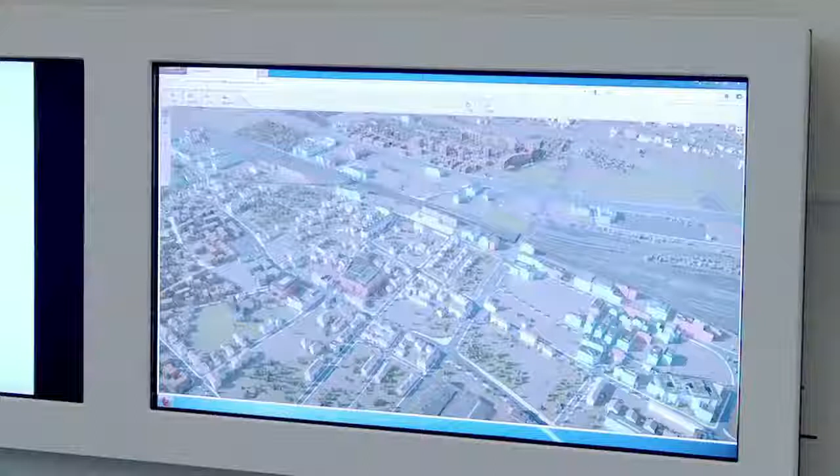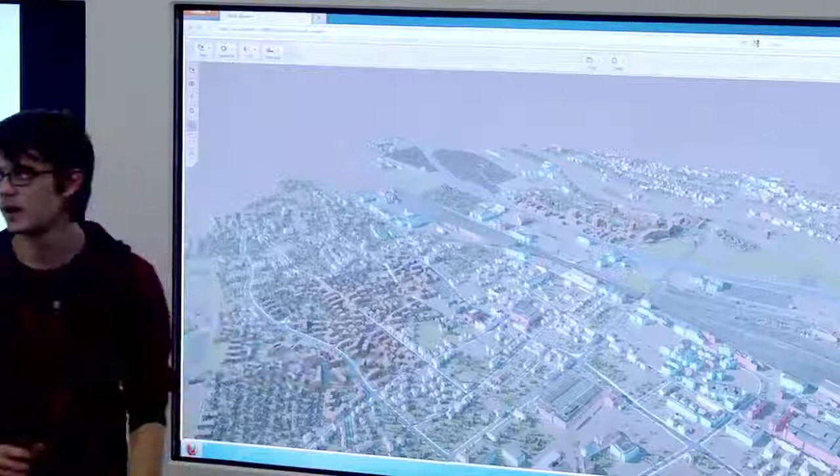Basically, this area, compared to the other areas, is very different because it lies between the railway, which we have here, and the highway going from Zurich to Aargau. So it's a very disconnected area, and we won't find housing there.

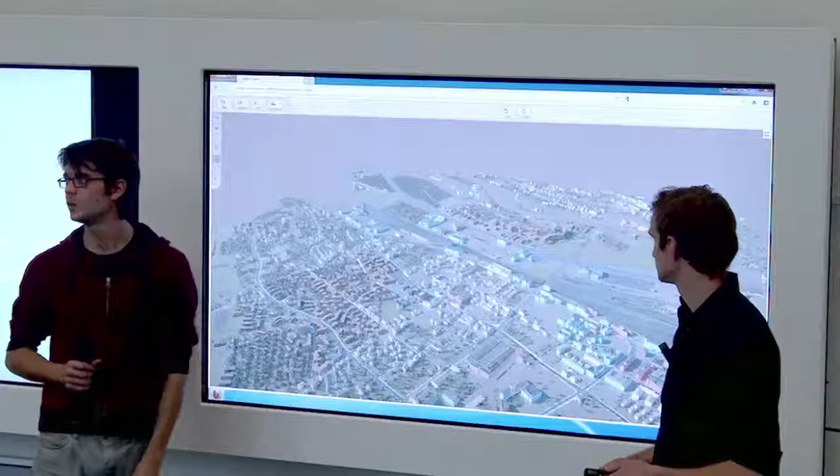As we said, it's a little bit different, so we'll only find special district zones. We took an analysis of different locations in the zone, and we'll see that the density going from Aargau, or let's say Schlieren, to the city will always get denser and higher.

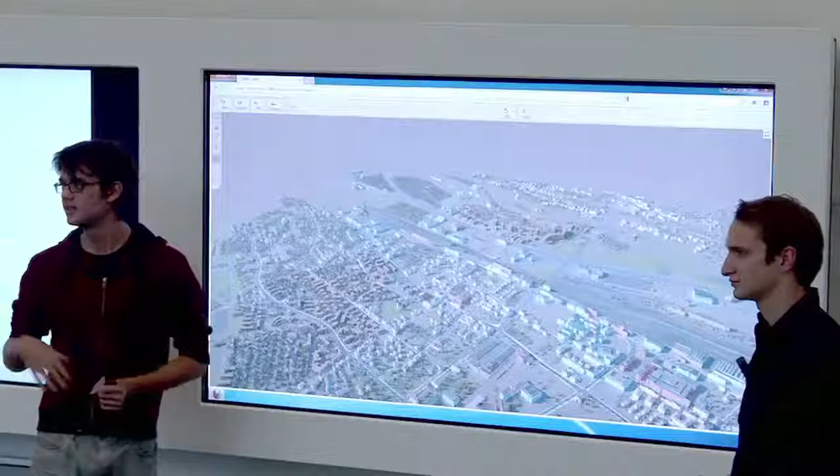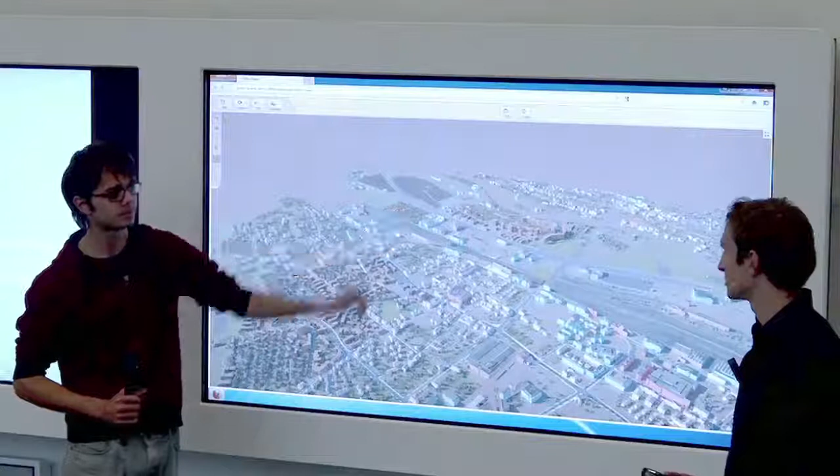We'll first start with sport facilities, then go to allotment gardens, then to storage halls. Our last typology will be office buildings. That's how we named the typologies. That's our area, as we said before.

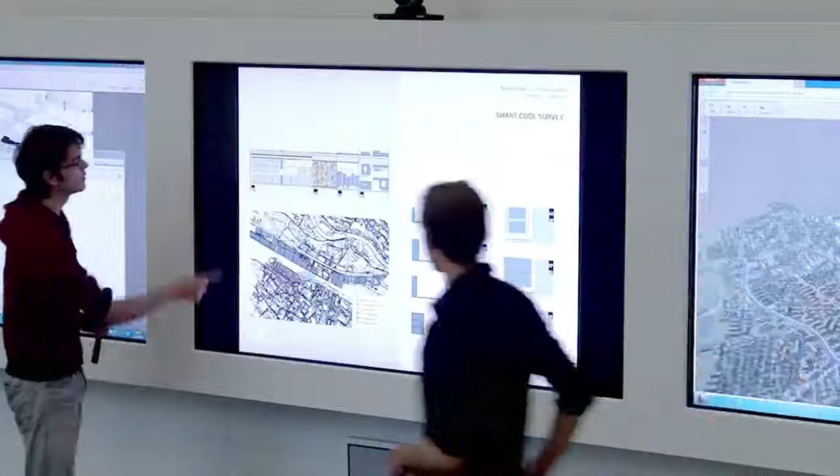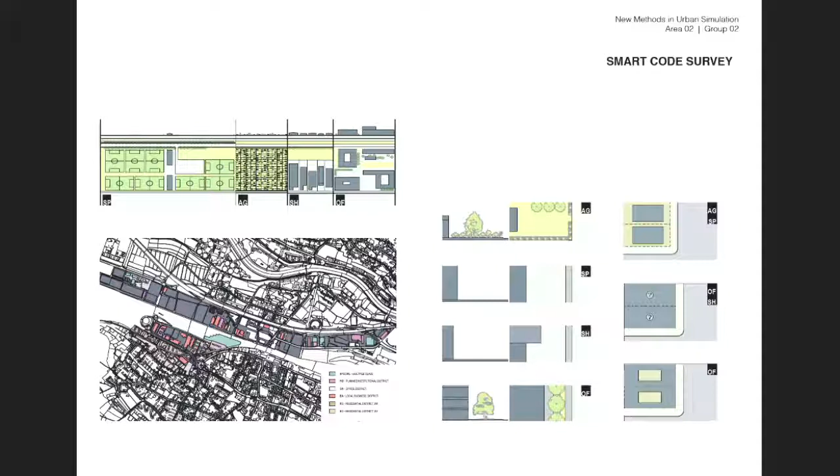Here we can see our typologies with the sports facilities. On the previous presentation, we tried to figure out what's the relation between the sport fields and the changing rooms, the sports facilities.

As the second typology, the allotment gardens have a very specific plot size which you can rent, and the storage halls are orientated to the railway station, with an orientation to the Aargaustrasse, where the highway is.

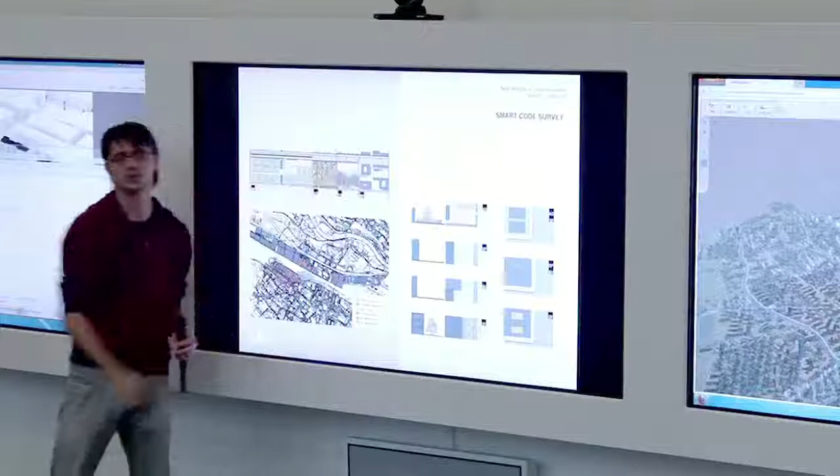As the last typology, we have the office buildings, which actually take the whole width of these 200 meters. As we can see in the section, it gets higher and higher, denser and denser.

As we can see here also, most of the area is special district, but we also tried to get into the single buildings and their function. So we have, as shown before, the office.

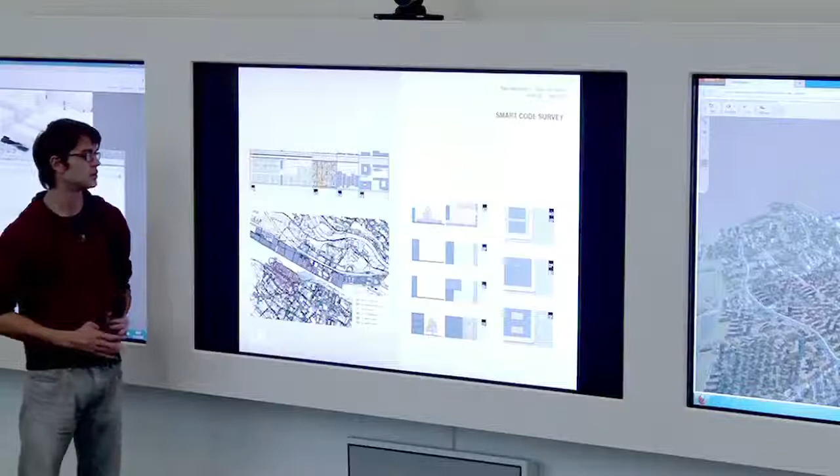And the storage halls. Down here we have some housing, but we didn't take a closer look at them because the other groups relate to them, so the typologies are the same. We're more interested in this strip, to get most of the typologies of it.

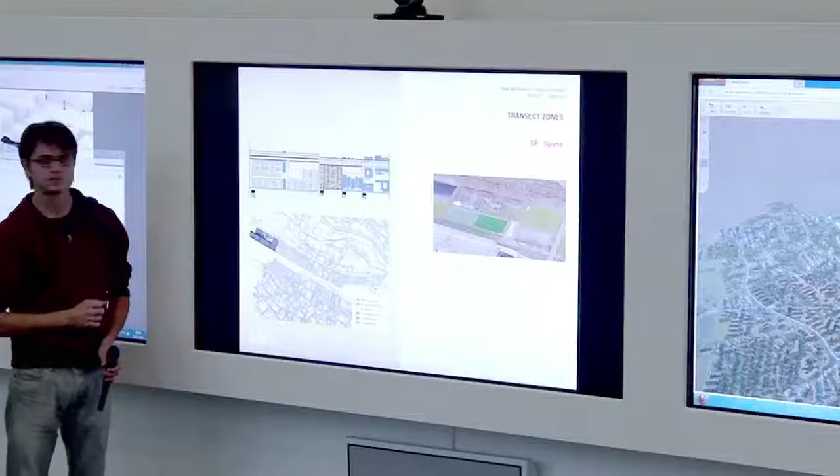Okay, this was the first type, the sport facilities. It's the use, or the reason why it's there, maybe it's just an infill because you cannot live there, and they are going to wait for more office buildings or whatever.

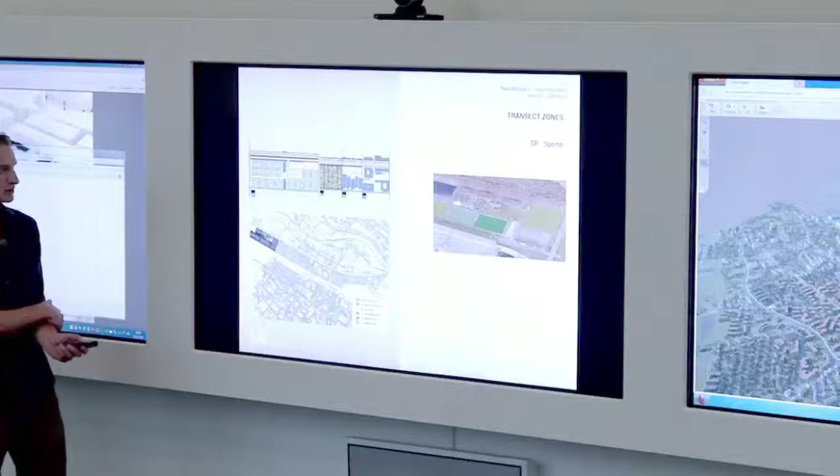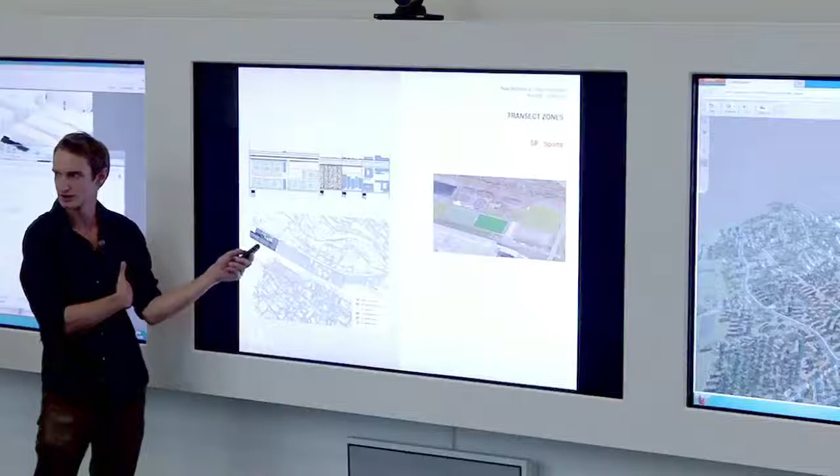We also explored that, for example, at the area of the allotment gardens, there will be a sports stadium or an ice hockey stadium built. So basically this is an area optimized for huge infrastructure or huge buildings, because access is good for huge infrastructure, but there's no small street system.

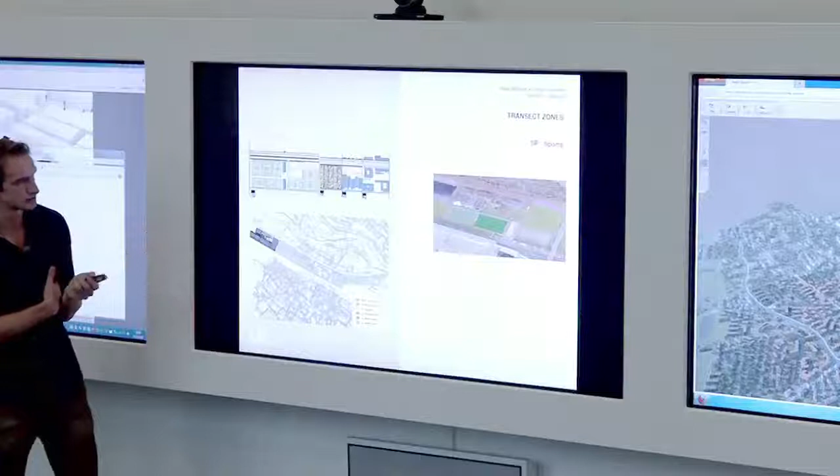So there's only these main roads, and small functions and small buildings don't make sense there. But until this is built, uses like sports and allotment gardens will be there. So we tried to put them in rule files.

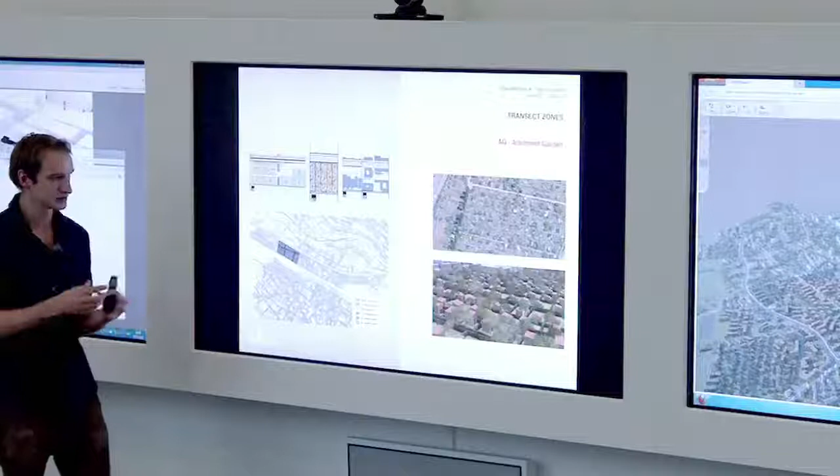This is our proposal for Schrebergärten. It's basically the same as the other group found out: small lots, many small buildings. Lot size about 10 to 17 meters, just filling the ground.

The next typology were the storey houses. We found out that they were only orientated to the Vulkanstraße close to the railway station, and we found two typologies there.

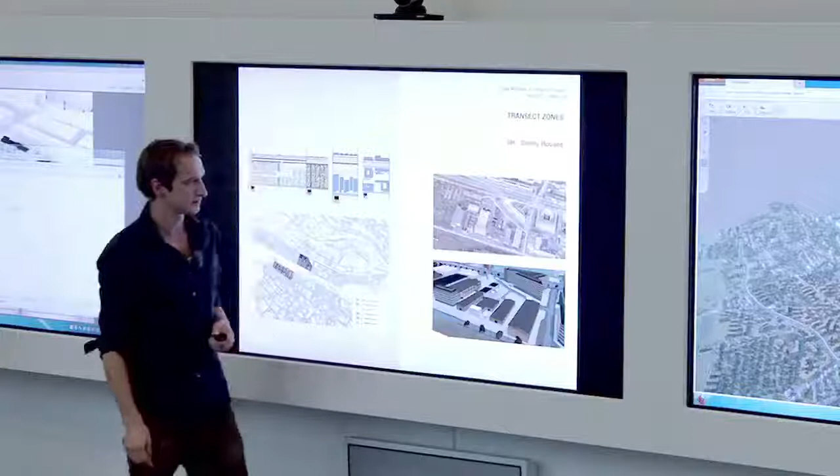One is the story hall, which is orientated only to one side and uses all the parcel lots. They are very deep. And at the Vulkanstraße, there's sometimes a kind of office.

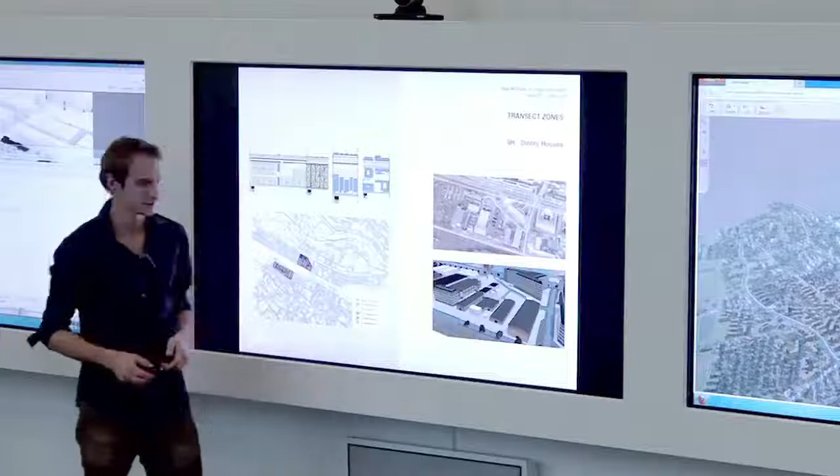There's an office building with more representative uses at the street side. We try to integrate some random functions for texturizing, like the pillar distance and so on, so that we can get some variance into the visual output.

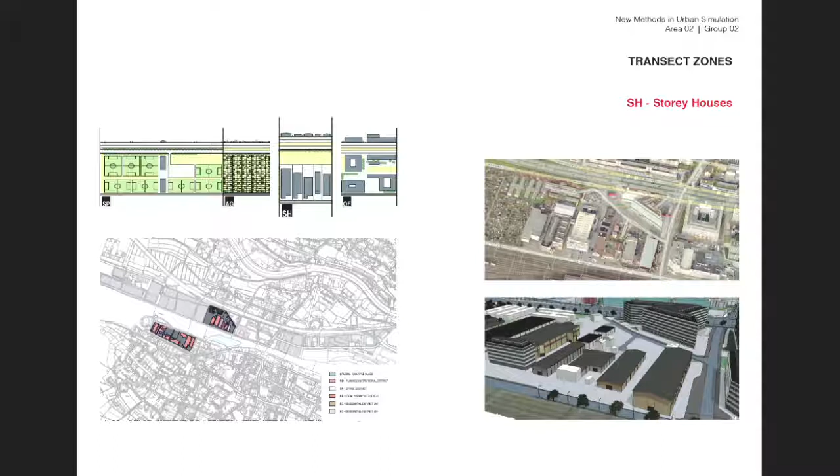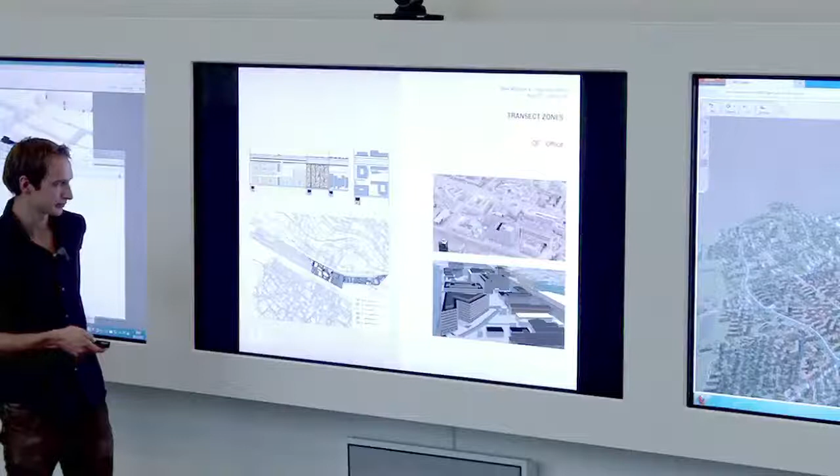In the background you can already see some office types. We really try to rebuild most buildings we found there. Maybe the best would be to get to the shadow analysis.

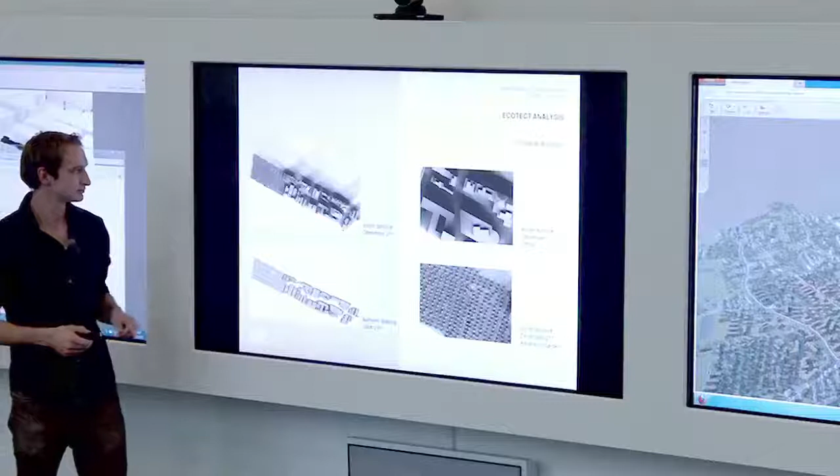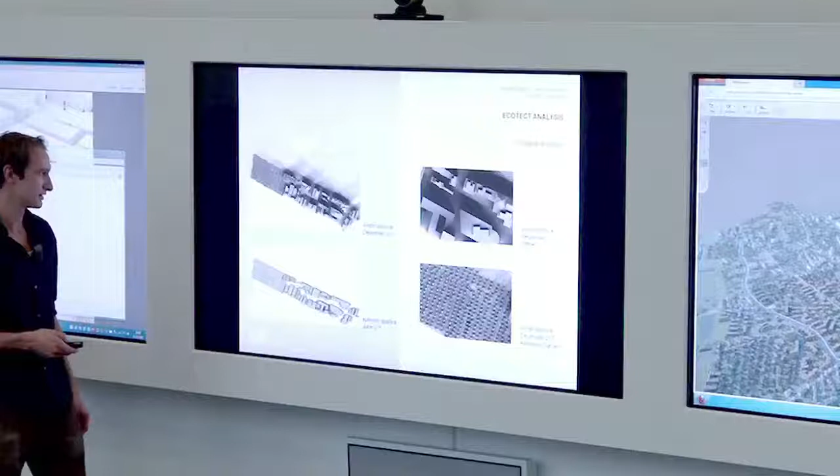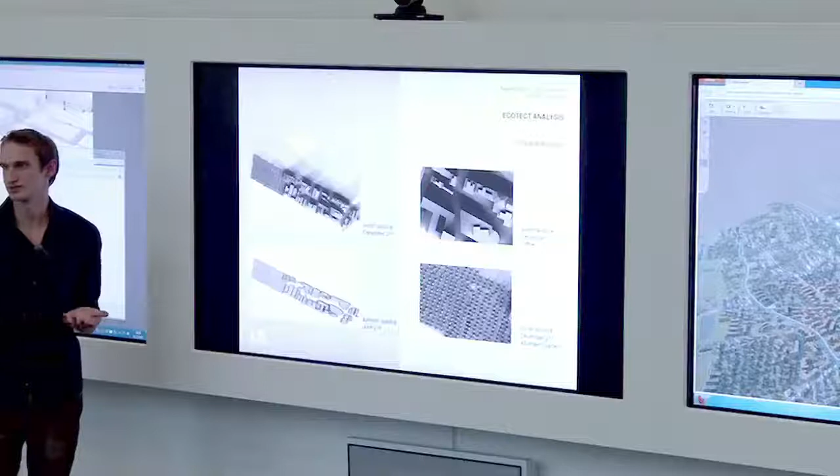As you can see, as the density rises, also the shadow zones get darker and darker. But it's an office building with story halls, so we can't really draw a conclusion because it's not a living or residential area. I guess there's also some error because there's a pretty much reflection from glazings and so on that's not recognized, so it's actually not so dark in the end.

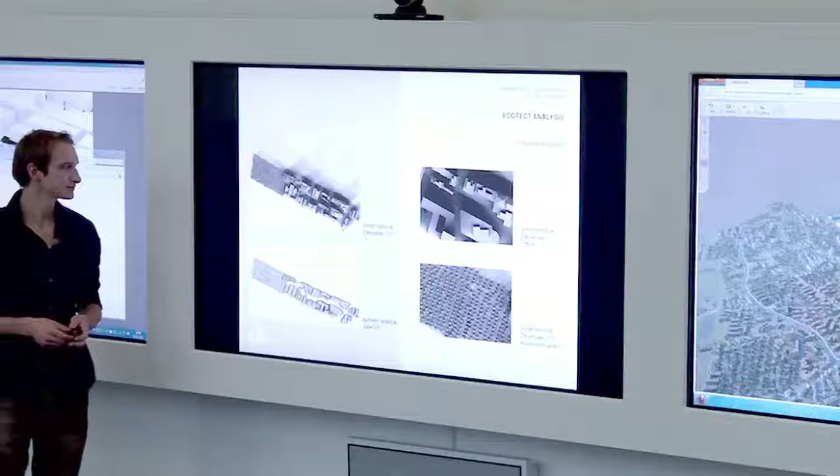But what's a nice indicator is how much you could actually harvest through the surface, for instance solar radiation in wintertime or not. So it gives you a trend. One side is the shadow occlusion, but the other thing is if you have more sun exposure in wintertime, it makes more sense perhaps.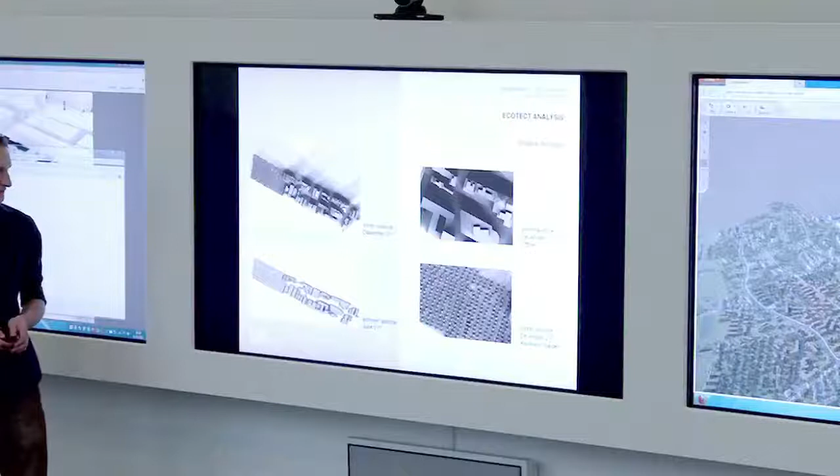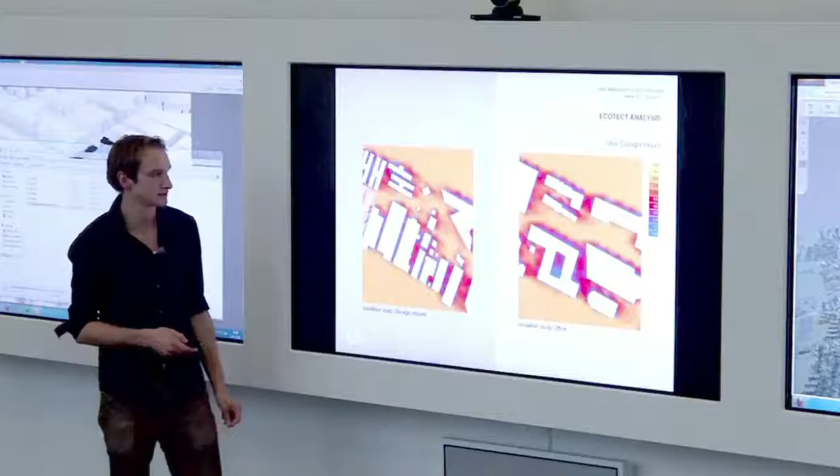So now also some sunlight visualizations. As you can see, in the deep storage halls there's less light, and in the inside areas of the block typologies of the offices, it's enough light.

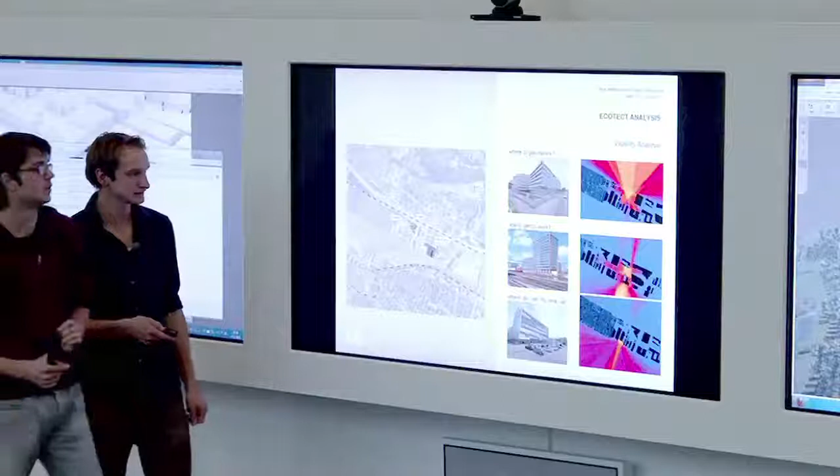And then we made some visibility analysis on certain points, for example the big Dudler high-rise office building, or a local bank, or a local store with shopping opportunities. As you can see here also, they're either oriented one way or the other.

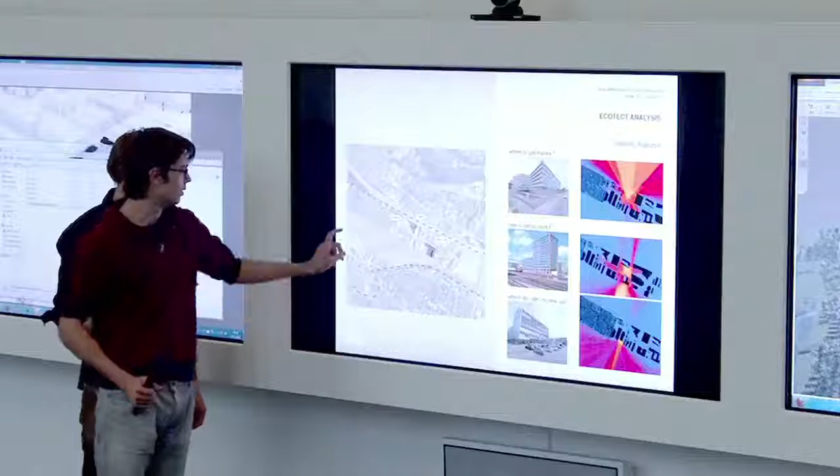We didn't manage to get renderings because we had some problems with the import, but we tried to do some stuff in Photoshop instead.

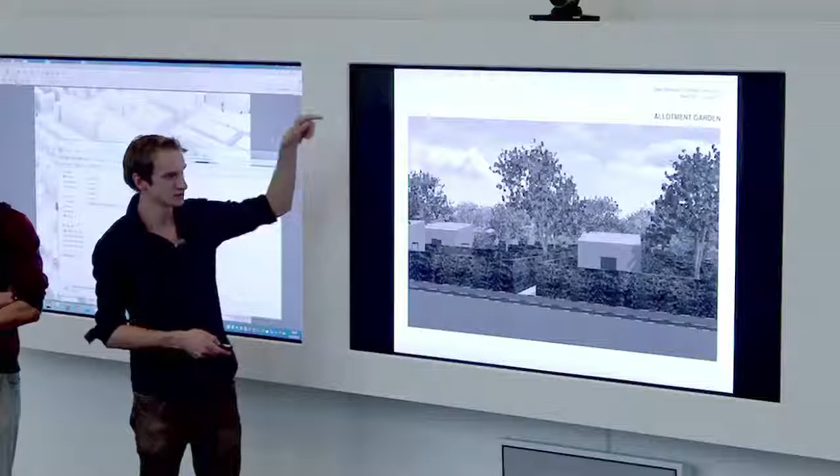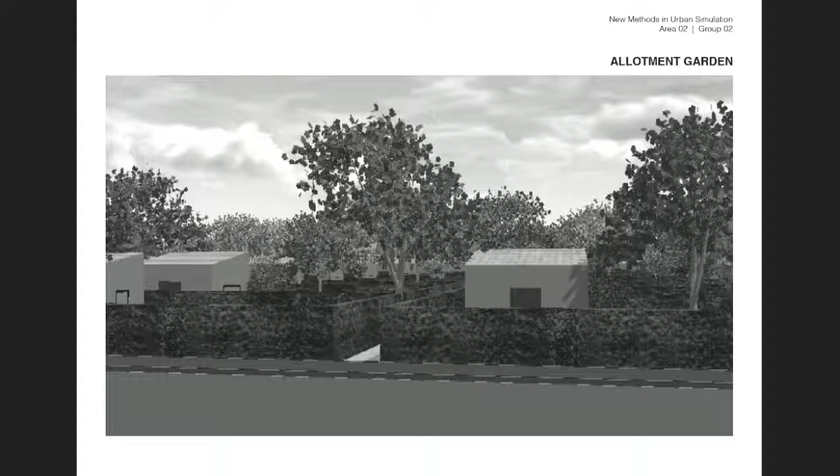In comparison to the views before, these pictures are more from the human side, from the street view, just to get an impression or an image of the areas. So this is the car shop before, with the storage halls and the office buildings in the back.

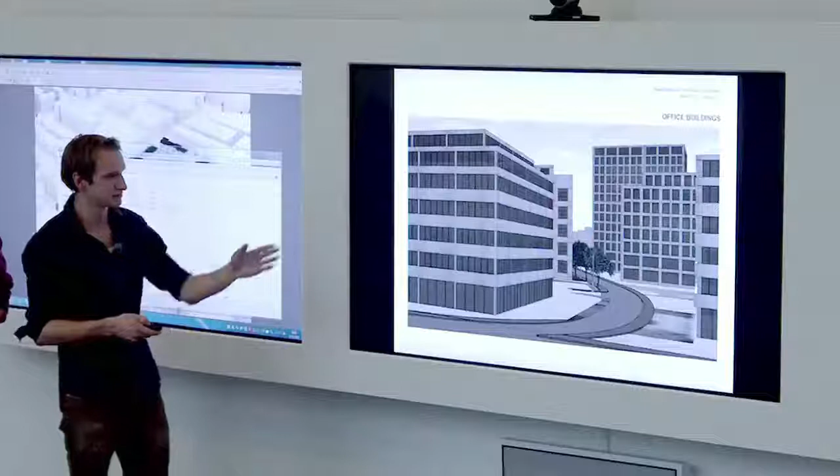Some storage halls, and maybe a street view from the office district with 3 to 4 different typologies of facades. We also really tried to get deep in detail for those facades, and the Dudler building.

So as you have just one area, maybe you'd also be interested to do the selective thesis, to get your nice renderings out for the portfolio of yours later on.

It's a pity because we really pushed for it, if you like. I'm quite honest here, we were really looking forward to having such nice visualizations as you've seen with the others. There's a web-based application and some tools we have on site that you could use to enhance, test, and verify, and then you can finally load them into a reality server.

If you do a group work, maybe 4 or 6 people, it would actually be kind of interesting to find out how you can set up this Altstetten area as a 3D model, which could be explored on a high-end computer through the internet. You can of course download your best shots and everything else as well, so this is an opportunity for what you can do.